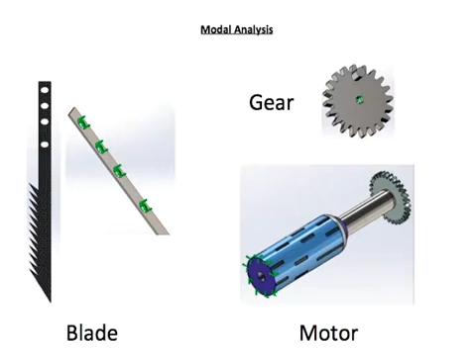Because our device has many moving pieces, the modal analysis has to be done on several of the components. The main components we picked were the blade, the gear, and the motor. From our results, we find that the first resonant frequency that occurs to the blade is around 277 Hz, which is actually something we have to watch out for.

The gear, on the other hand, doesn't have a resonant frequency until around 7,800 Hz, highly unlikely to happen. For the motor, the first resonant frequency occurs at 630 Hz, which, although it's a little high, is still something to be aware of.

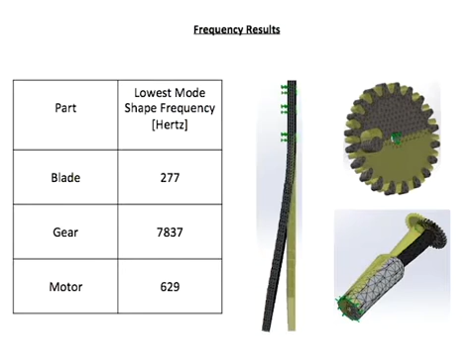A thermal analysis was made to see how hot each component got when a portion of its power rating was applied. We set two different convection loads on the interior and exterior surfaces and a thermal contact set on the gripping case, while applying heat power into the motor. The first iteration showed the grip to be too hot and the case to melt. In the second and third iteration, the addition of a grip and a change in materials led to lower temperatures in a structurally intact case.

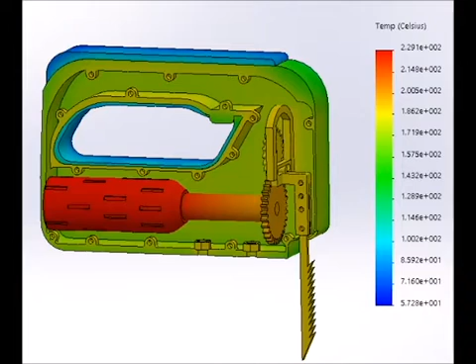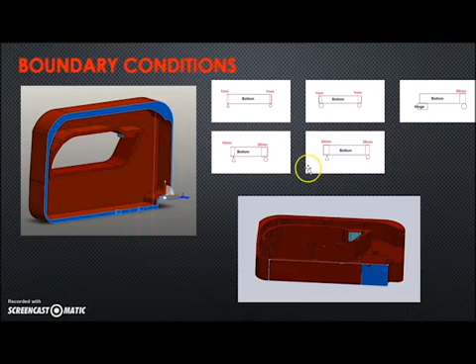We did a static analysis on a shell with different loads of 5, 20, 50, and 100 Newtons applied on the top handlebar. Symmetric boundary conditions are also applied. Different boundary conditions are applied at the bottom shell utilizing the split face function. After running the analysis, the max stress happened in these areas, so we added a fillet right here.

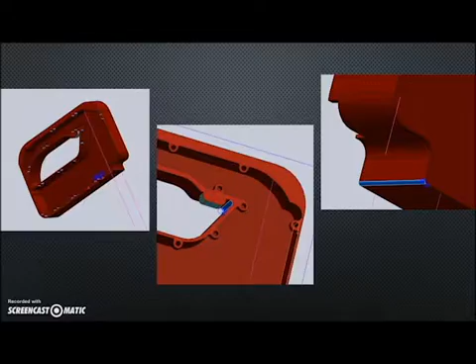The stress concentration reduced. For the final iteration, we added fillets in those areas to ensure that the sharp edge isn't causing problems. The results show that the maximum stress still happens at the corner of the handlebar, but is likely reduced at the bottom edge. Maximum displacement results on the top of the handlebar where the load is applied.

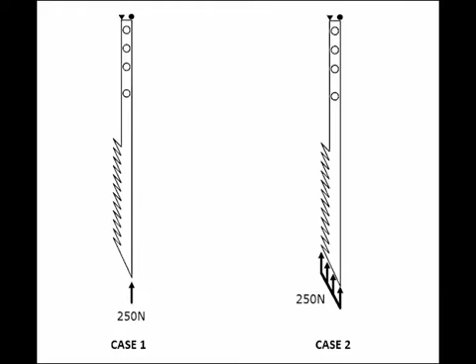We performed several static analyses to assess the integrity of the jigsaw's blade. In case 1, a load of 250 newtons was applied upward on the blade tip. The counterbalance by the user led to the fixed constraint on the top face of the blade. On the other simulation, we applied the same load distributed over the blade's entire bottom face. The results for our first iteration showed yielding in both cases.

The modifications made to the blade in the second iteration lowered the maximum von Mises stress by a factor of 9 for the first case and a factor of 7 for the second. Although the blade withstood yielding in the second case, buckling was still a concern.

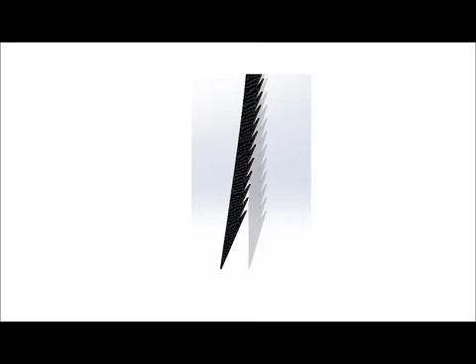Through regular usage of the jigsaw, the blade must be subject to forces along the cutting edges. High amounts of force in the plane of the relatively thin flat section of the blade make it much more susceptible to buckling out of plane. This is alleviated in the later iterations of the blade, which is thicker.

The blade holder is more susceptible to failure through deformation than by buckling. By reinforcing the place where the connection to the blade and the connection to the gear train meet with a fillet, this is also prevented.